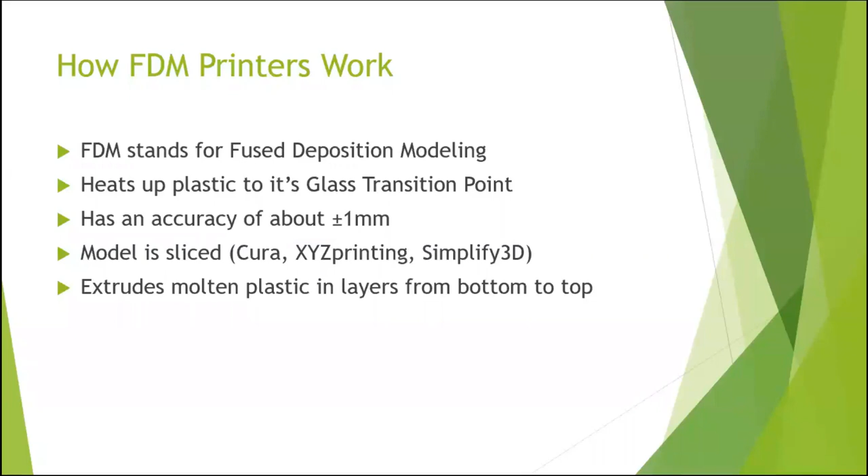So next thing I want to go over is keeping the material that you use in mind. There are just loads of different plastics available for 3D printing. There's a few that I would probably recommend for a beginner. These are going to be our PLA and ABS. And then we have a couple down lower for more exotic materials, say you'd need to do a more production build.

Starting with PLA, PLA is sort of our go-to plastic for everything. It's great for just getting started with printing. If you're printing something meant to be pretty, like a little statue, maybe a phone holder, just something small, I would probably recommend the PLA. It's super easy to print with.

The only thing with PLA is that if we wanted to use it for a functional piece or part, we have to keep in mind that it doesn't bear loads as well as some of our other materials. You could still easily rest your phone on it, make something like a Nintendo Switch games holder. But if you're gonna try and put a bunch of stress on it, it's going to be more likely to break, which is where our next material, ABS, pops in.

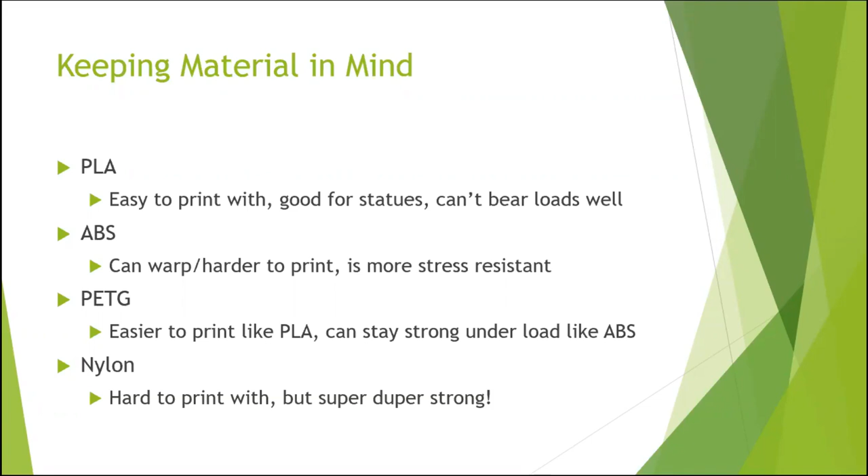All right, now let's go over some of the weaker points of FDM printers. FDM printers, while cool and they can print almost anything, there's a few things that we're going to want to keep in mind when we're choosing a model to print with an FDM printer.

If we want to print, say, like a little statue that has arms out, we'll want to remember that FDM printers cannot print directly in air in most cases. So we're going to want to add supports underneath those arms to make sure it can print.

A good rule of thumb is to keep everything under 45 degrees. If it's leaning over 45 degrees in the air, it's probably not going to be able to print. But as long as we keep the angles that it's printing at within that triangle, and I'll make sure to show you an example of that later, it should be printable.

Another thing to keep in mind is lines introduce weak areas. The problem with FDM printing is the lines that it introduces. You might have seen, if you've seen a 3D print before, that it's a little rough around the edges, or that you can see all those lines going from the bottom to the top. Well, those lines are technically weak points.

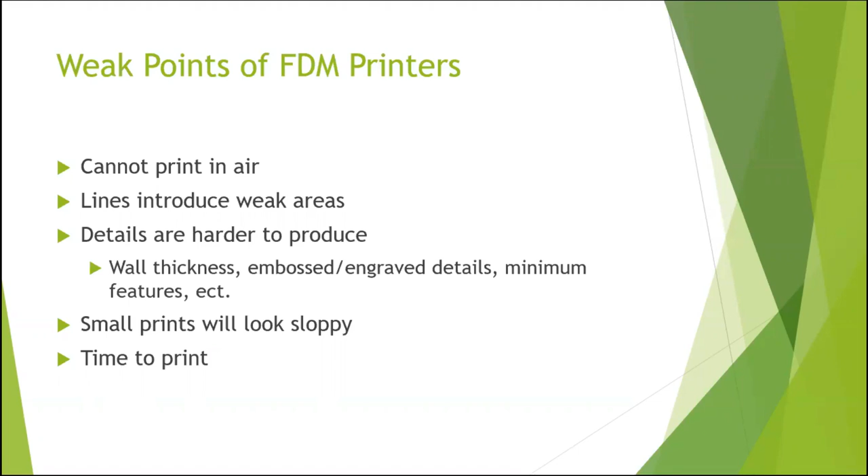All right, and now here's some of the basic rules, more suggestions of the printing. Make sure a print is supported. We were talking earlier about that 45-degree angle that we're trying to keep. And basically, if it does go over that 45-degree angle, it doesn't mean it's unprintable.

If we have a part that has 2 pillars in between it and we need to print solid above it, the printer is actually capable of printing on air in that case specifically. It's a feature called bridging, and that is when one piece of filament travels across a line to another pillar.

If we do need to print over 45 degrees, we'll want to enable support, which is going to print extra filament that we can tear away later. And that's going to give it a place to lay down on as it's printing out. You're still going to get your whole model.

You might need to clean it up a little bit, do a little bit of sanding underneath some arms from some characters, but as long as you do have that support, or you keep in mind that you cannot print in air, you should be quite all right.

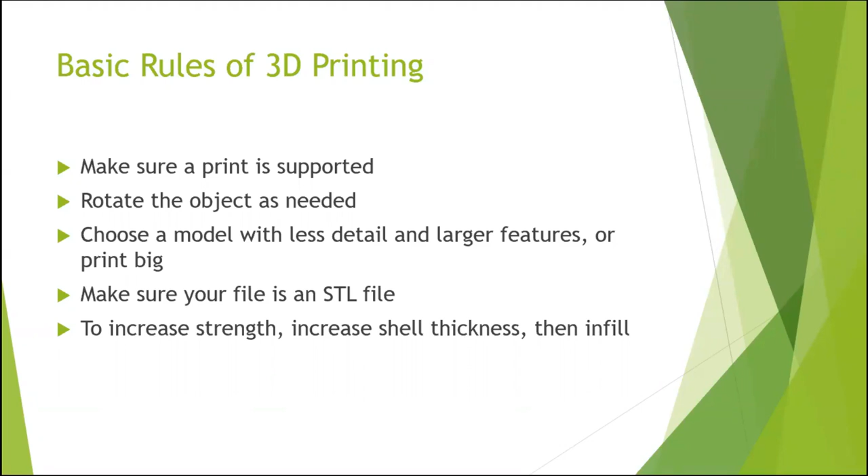And then there's also infill, which is the amount of volume taken up by plastic. And you'll see it in percentages such as 15 or 20%. Generally, for most prints, I would recommend 15%. It's a good fill to budget ratio. In some cases, you could probably get away with 10% infill, 10% being plastic, the other 90% being air. But 15 is a good happy medium. If you're going above that, you've got to find a good reason, I would say.

MyMiniFactory is kind of like Thingiverse. It's also fairly large, but it's more curated. Their whole motto is making sure that it's printable. Thingiverse can have anything and everything, sure, but it's also going to have a lot of unprintable 3D models, whereas MyMiniFactory will make sure the models are clean, and it should have instructions on how to print that model if there's anything special you need to do.

Last one is Yeggi.com, and this is sort of like a search engine for 3D models. Think of it like the Google for 3D printing. It's going to go to multiple websites like Thingiverse, MyMiniFactory, and a few others, and it's going to put them all in one place for you to find. You're more likely going to have unprintable models looking at Yeggi, but if there's something that you absolutely must have, I would say check Yeggi out, see if you can find it there.

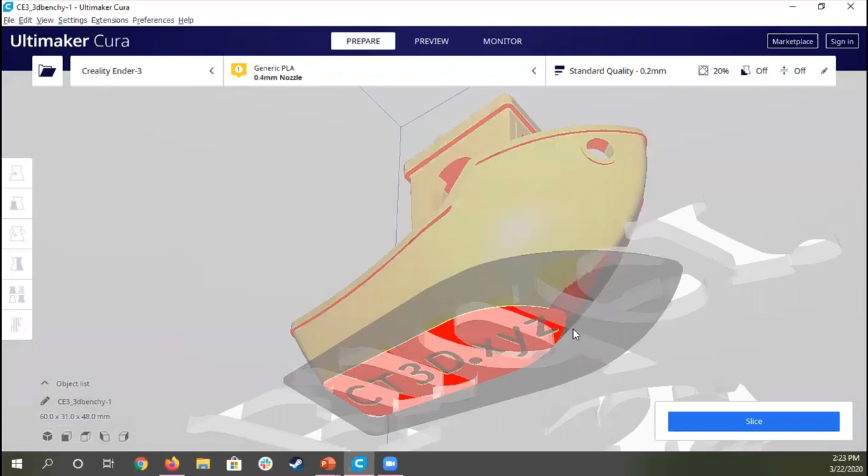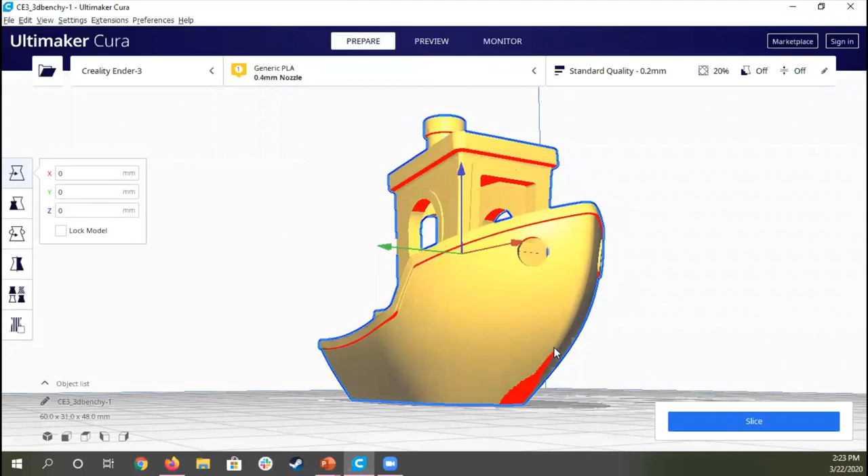And if we look underneath it, you'll see the red. This is highlighted because it's over that 45-degree angle zone where it most likely won't print correctly. If you see above it, the angle becomes much steeper, and this is because it has a place to actually print on top of. It can branch out a little further each time, but once we hit that 45-degree, or about right here on the boat, if you can see my pointer, in that red area, that's where it's going to have a harder time printing. You can also see that with the ceiling of the boat, just anywhere it's highlighted in red.

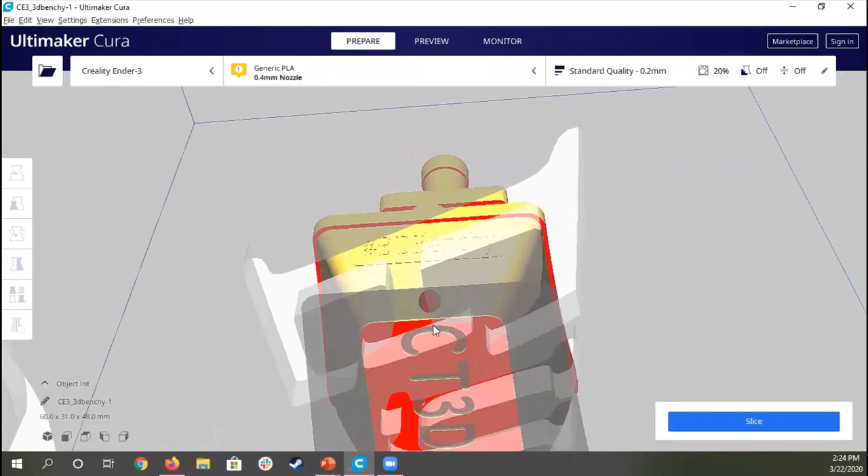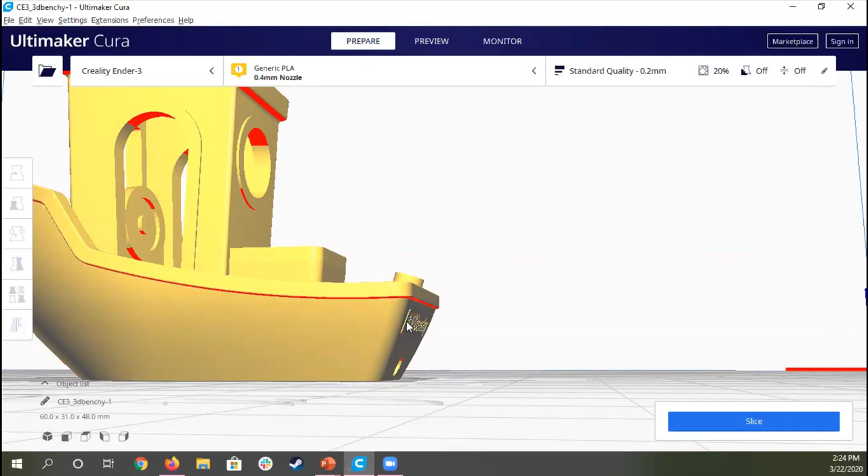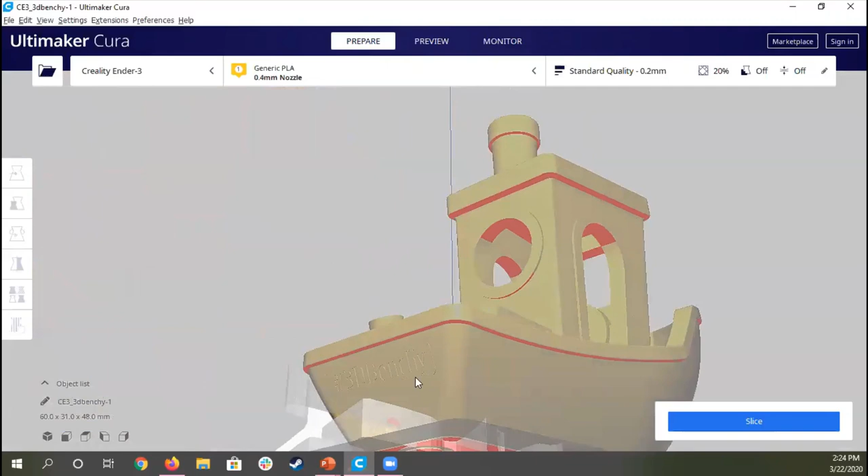Now let's also take a look at that embossed text that I was talking about earlier. If you can see that little rectangle sort of on the butt of the boat, that is text that's been pushed out away from the model. This text is going to be harder for the model to print, not only because it's not really attached to anything physical, but it's just jutting out at an interesting angle. That and with the small details on it, such as the hashtag 3D Benchy that you see right there, the printer's going to have a harder time making sure to get that written out correctly. It might even just erase it on some printers and call it good.

If we look underneath it, we have an engraved text. This text, instead of being pushed out of the model, has been pushed inside of it. Now it's larger, so it's going to be more likely to print, but you do want to make sure that it is about 1 millimeter, 2 millimeters thick from edge to edge on the inside of the text.

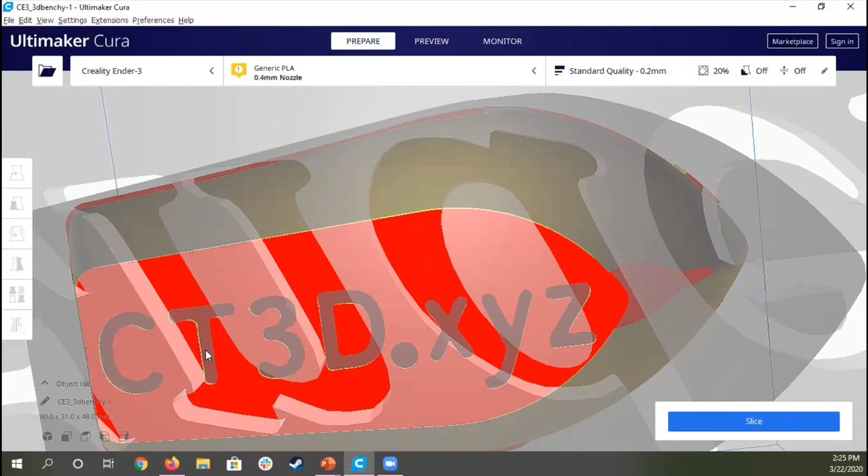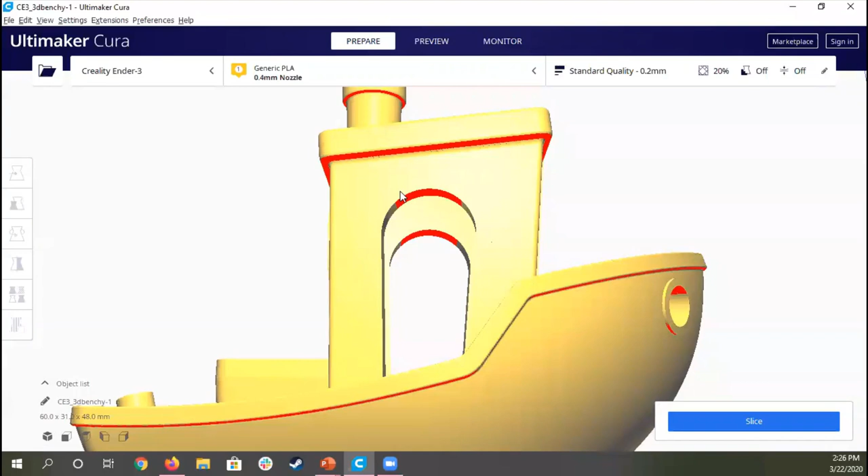So here's another overhang right here, the arch of the doorway. Now this is more likely to be successful than just printing out into the air, because it is going to have something that it can bridge to eventually, but you're probably going to see some strands of filament just hanging off from that door frame after the print, and that we can easily clean up.

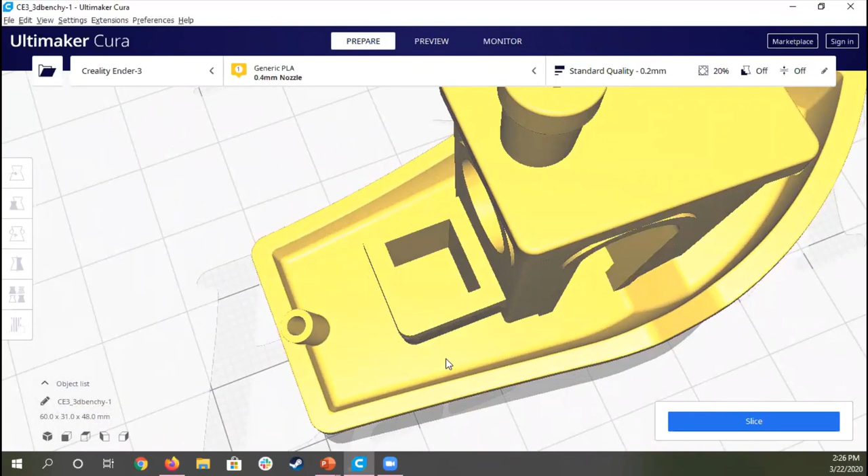Another thing to keep in mind are holes. This is something I believe I failed to mention, but printers do not like holes very much. They like straight lines, rigidity, and wide sweeping curves. Small holes, on the other hand, it does not do so well with. Something like this should be fine, but if you had a technical print that you needed to have an exact diameter hole, you'd want to make sure it is bigger than 2 millimeters. I might even say 3 millimeters in diameter.

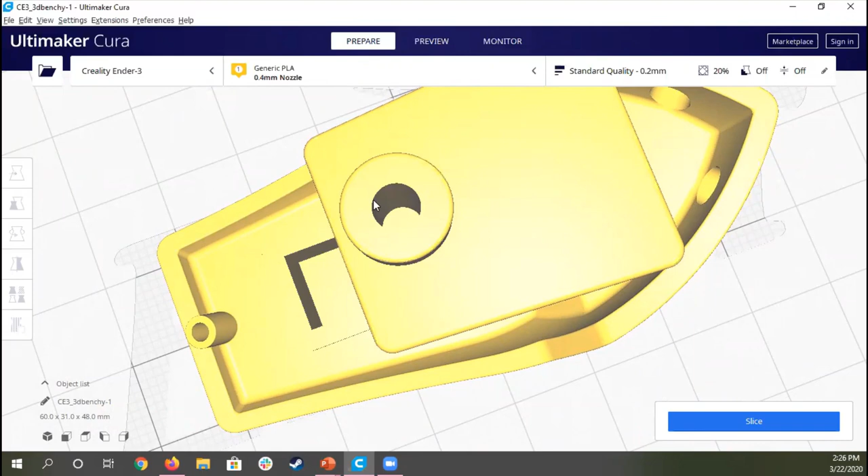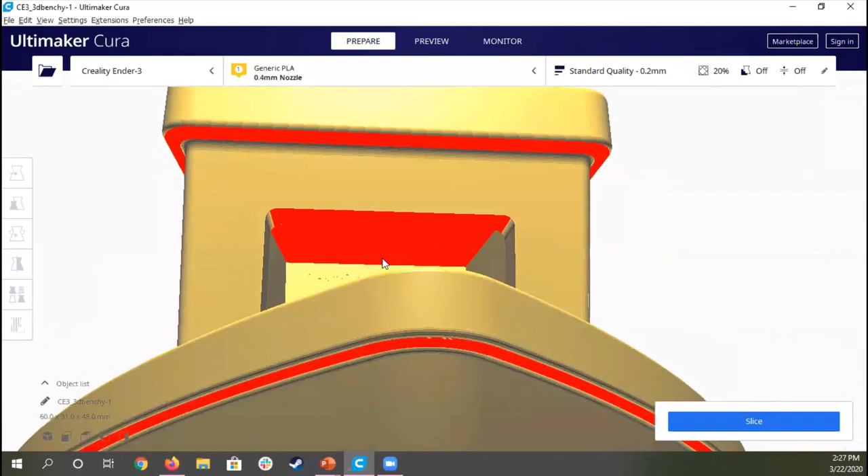Last part right here, if we look at the ceiling, if we can just sort of get inside here, you can see that it's red, it's printing in air, but it's fine because it is going to be able to make a bridge between the left side of the ceiling and the right once it gets to that point.

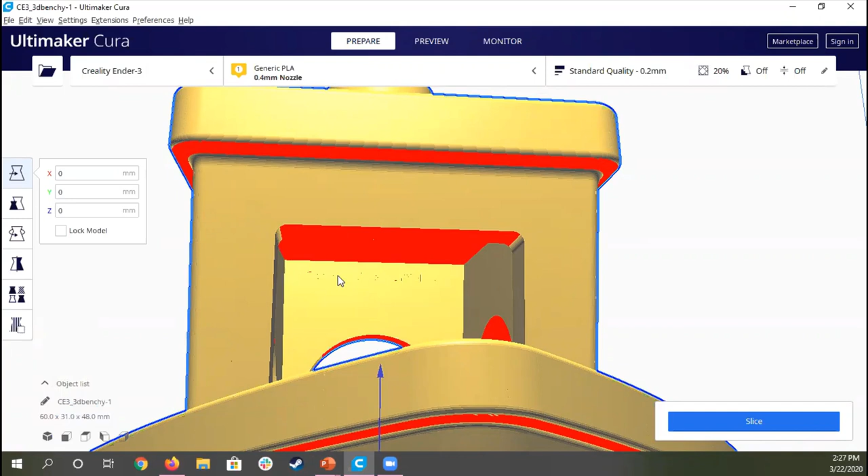Now, when you are bridging, you want to keep it at a specific distance or underneath it. It can only go so far with one strand. I would say about 10 millimeters is as far as I would push it. You might be able to go a little bit more, but I wouldn't recommend it. But anything under 10 millimeters should be fine when it comes to printing.

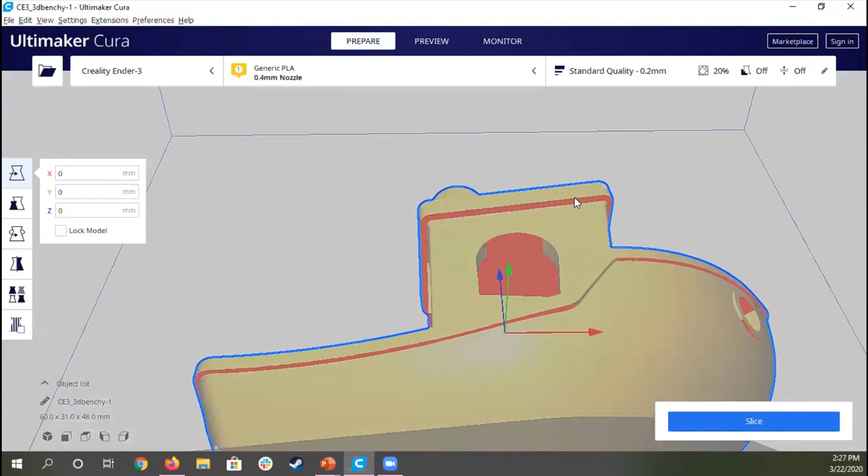Alrighty. Now let's see if there's anything else that I could point out. Besides the edges, the ceiling and that pipe right there are probably not going to have as good of a time. We have more embossed in this circle right here, the little steering wheel. So normally this isn't a print that I would recommend printing, but this is meant as a torture test. It's supposed to show you the limits of your 3D printer and see how far it can go.

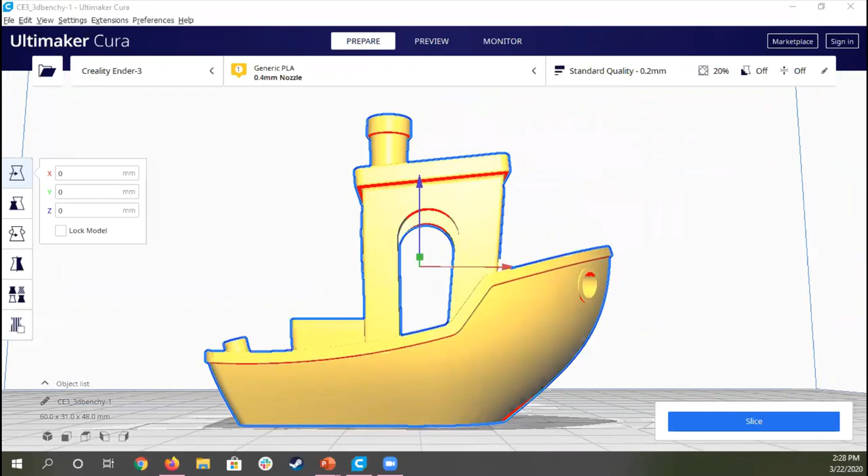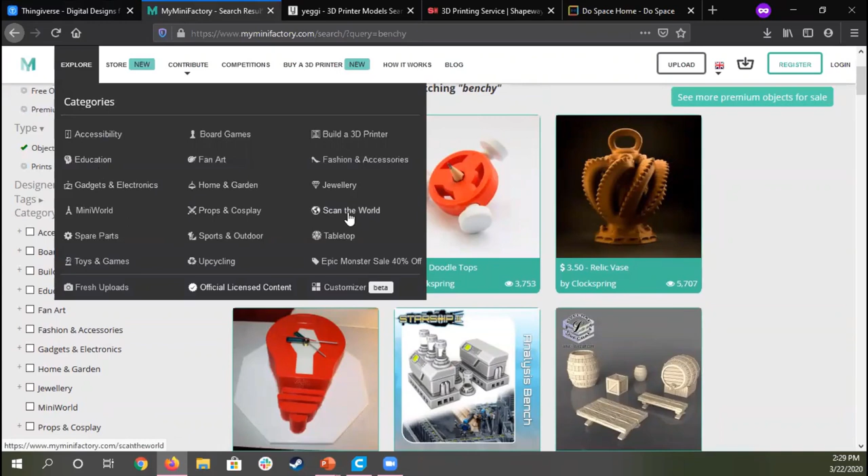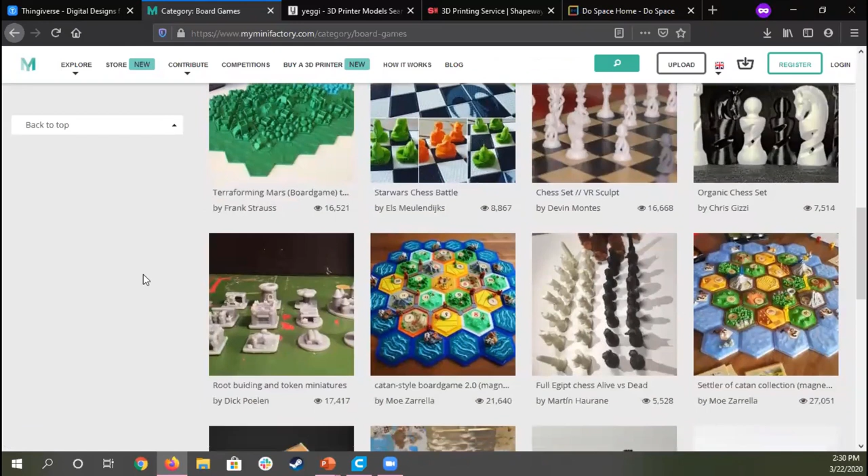If we head over to My Mini Factory, it's sort of more of the same. If we did want to explore, you can see that they have different sections for pretty much anything, such as cosplay, items in the world that have been scanned, fan art, board games. If you wanted to print out some special chess pieces, like this minion set, that's kind of funky. But yeah, these are all things that have been printed before and can be printed again. So I would recommend checking out My Mini Factory and talking to us while keeping what we've talked about in mind.